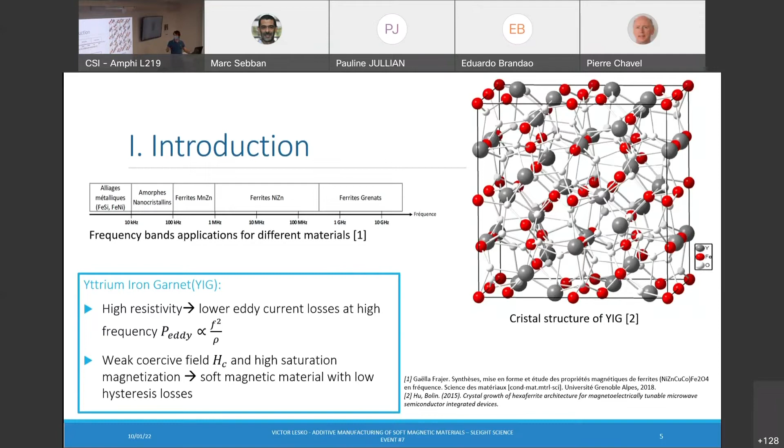There are two main goals in this thesis. The first one is the development of a selective laser melting process for YIG powder, which means finding the good parameters in order to keep the good magnetic properties of YIG, as well as keeping good mechanical properties. We want to make demonstrators like circulators and isolators for microwave applications.

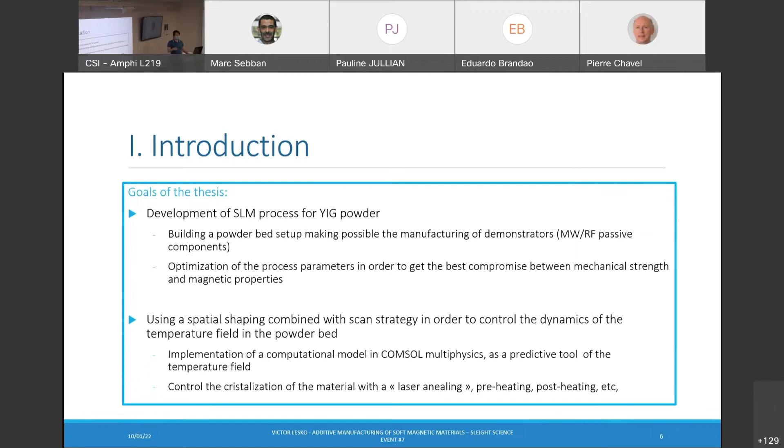The other main goal is using spatial shaping of the beam and associating it with a wise scanning strategy in order to control the dynamics of the temperature field in the powder bed. So now let's talk more about selective laser melting. It's in the family of powder bed processes because we are directly melting a powder layer thanks to a laser source, rather than putting down material locally.

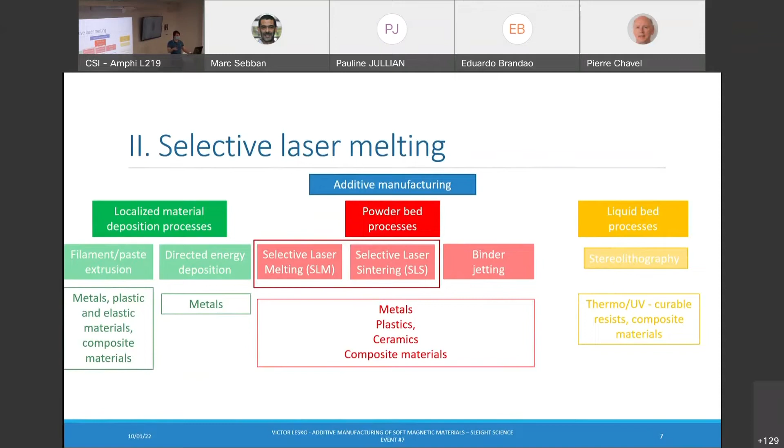This is a typical setup for selective laser melting. It can be divided into three main steps, which are repeated until the part is completely built. The first step consists in spreading one layer of powder. Then the layer is scanned by the laser beam, and the powder is melted selectively. And finally, the build platform is lowered, and another layer of powder is spread, etc.

And at the end of the process, the powder which has not been irradiated by the laser beam is not melted, and it is removed, and the part is made from the melted powder. It's a relatively quick additive manufacturing process with a good resolution compared to mechanical machining, for example.

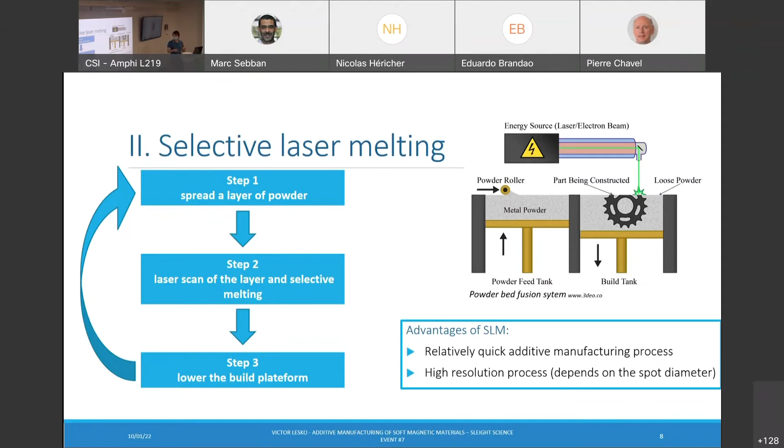These are the parameters which are involved in the selective laser melting process. It is dependent on the laser power, the height of the powder layer, the space between two laser lines, also called the hatch spacing, and the scanning speed. And the scan strategy is important too, but more from a mechanical point of view.

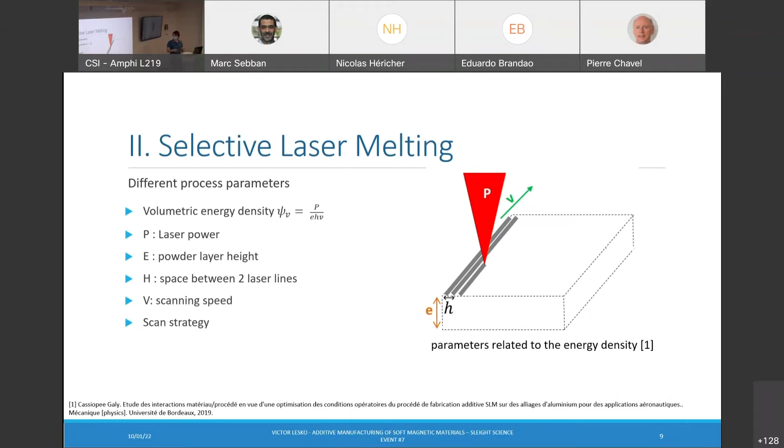At this time, we don't have the powder bed setup. We are using this setup, which is made from a galvanometric scanner, and we are using an ytterbium fiber laser in the infrared to melt our powder. And as we don't have the powder bed system, we are using a suspension of YIG powder in ethanol. Then we take this suspension with a pipette, and we drop it on our substrate. The ethanol evaporates, and only a thin layer of powder remains.

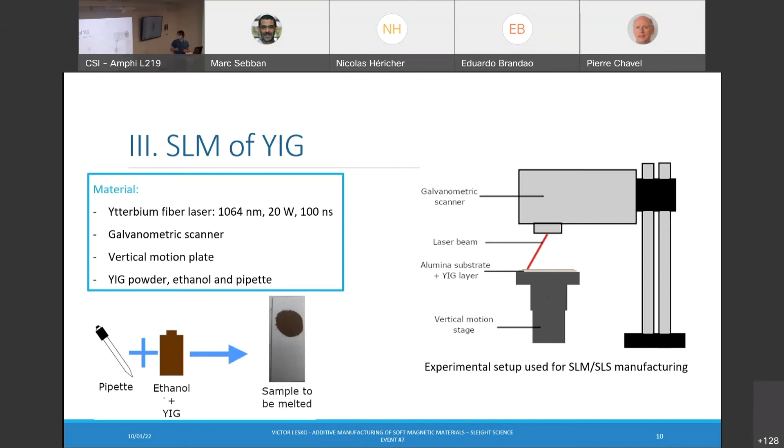These are the previous results which have been published on YIG. Many parameters have been tested, and the Raman analysis shows that for low laser power, there is the occurrence of a hematite phase in the sample, and for higher laser power, there is a phase transition into magnetite phase. And also it was reported that the sample was destroyed after 10 layers because of residual stresses. And the other figure shows that the sample is still magnetic after the SLM process.

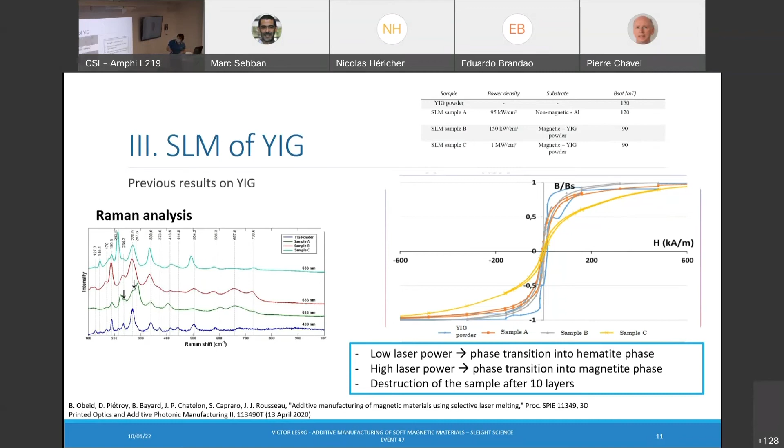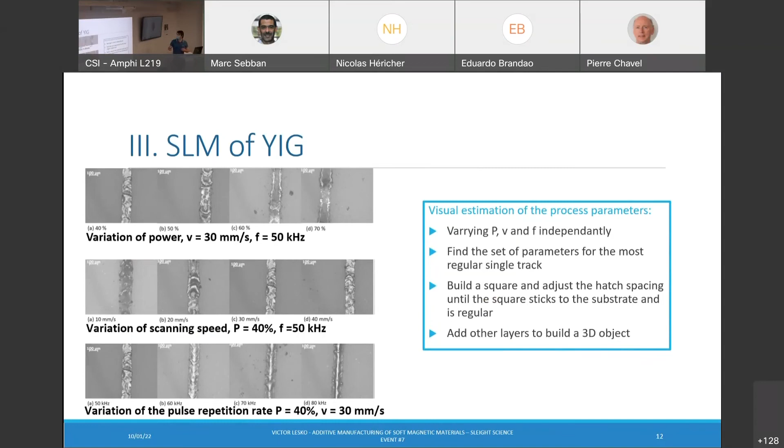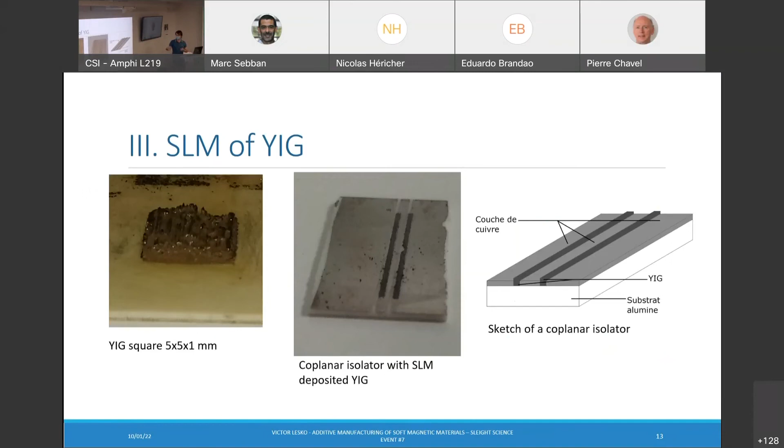And this is to show that we try to find the best parameters for the SLM. And we vary the power, the speed, and the frequency. These are the results we got. And this is a square of YIG of 1 millimeter height. And this is a coplanar isolator.

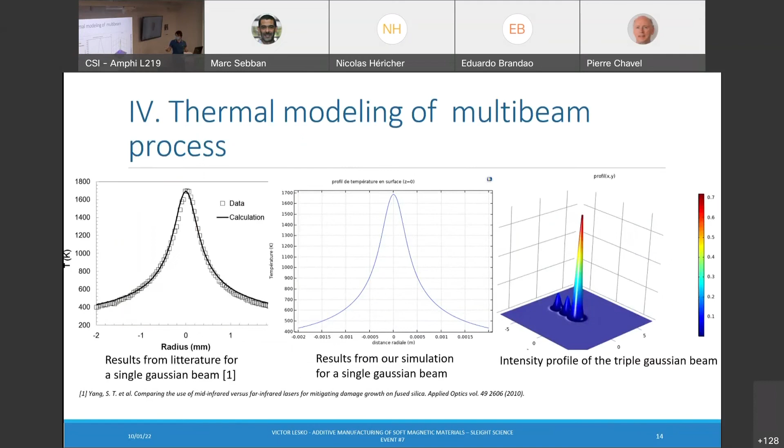We also made some thermal modeling. This is a simulation for a silica glass sample, but it can also work with our powder. And this shows that we can reach a temperature step by doing multibeam processing. And we can also do some preheating, and the temperature step allows us to avoid a peak temperature.

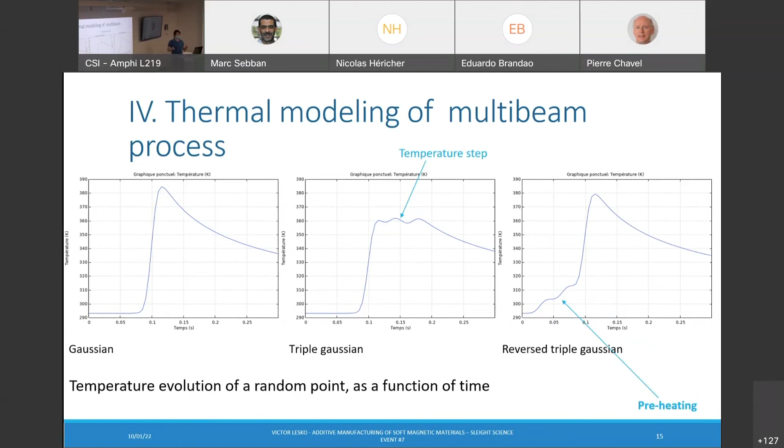Okay, to conclude, embedded electronics are everywhere, and the components are more efficient in 3D. And also it allows us to make lighter and cheaper components. SLM is the most suitable additive manufacturing process, but it is difficult to set up because of the complex structure of our material. And also, we showed the feasibility of using a multi-beam process to avoid, for example, annealing or long post-processing.